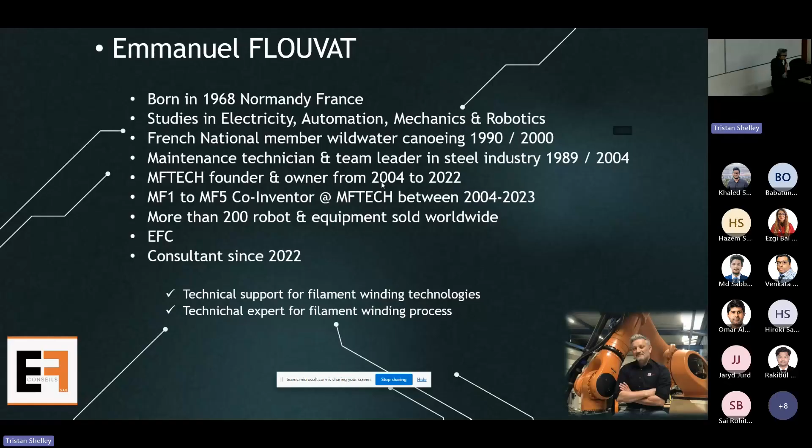So where I am involved today on some small parts, for example, continuing developing kayak shafts. I assist my customers also to develop gas tanks or other kinds of shafts or propeller systems, new systems with filament winding, easy to use or maybe sometimes in a complex way. So this is the job I'm doing today everywhere in the world.

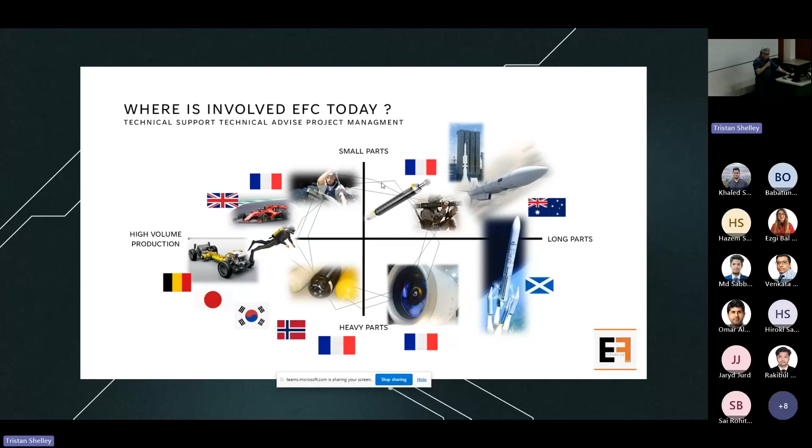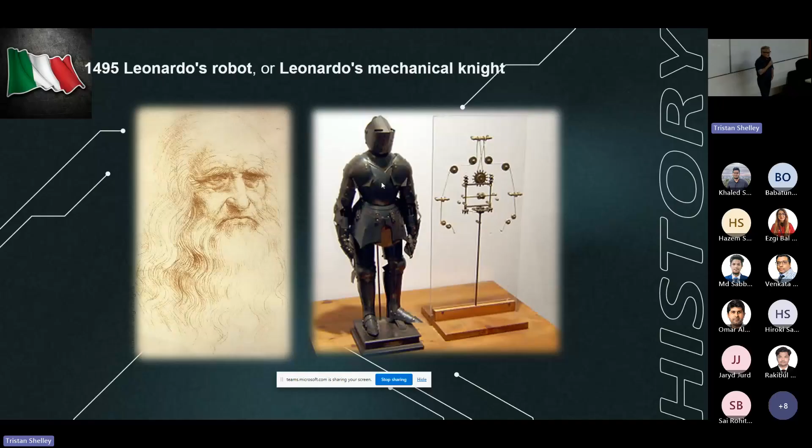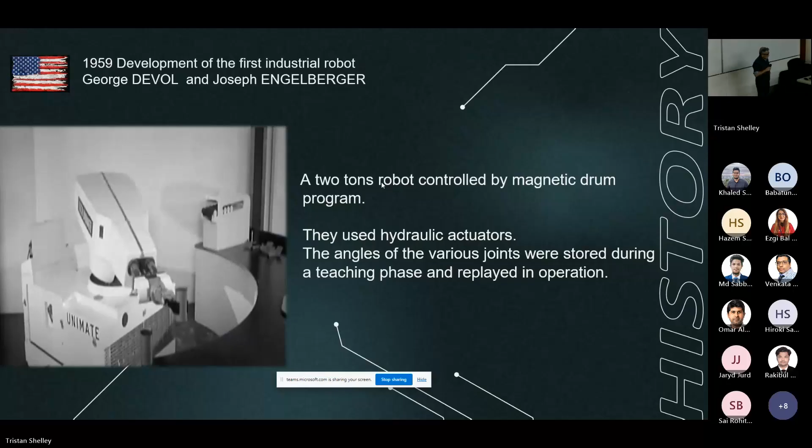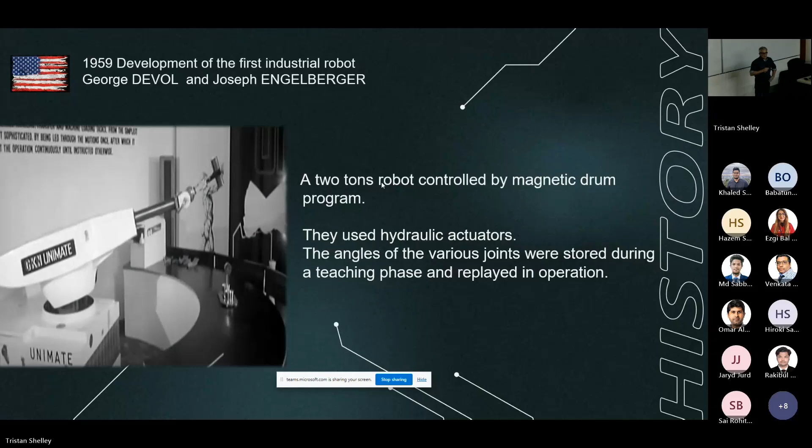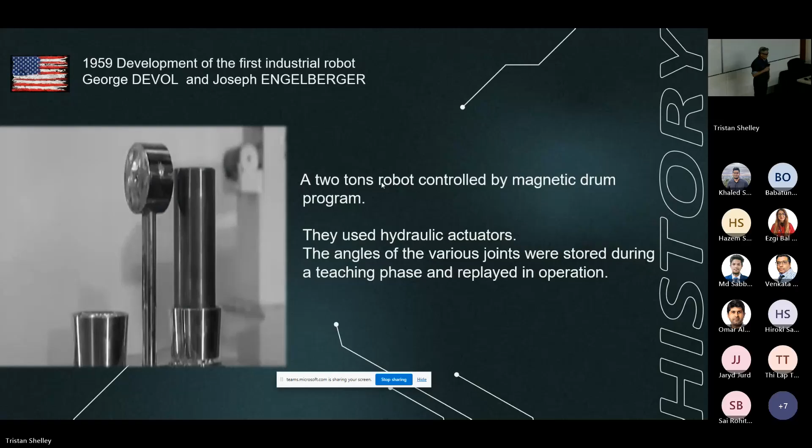So the first video I find, or some colleagues discussed, the first robot. It was in the US in '59, where 2 guys developed this new kind of machine. So maybe '59, but it was the first idea of a robot, and it was very accurate.

So robotics today - what we know is that robotics is everywhere in the world. So another video to introduce the robot today from the IFR, International Federation of Robotics.

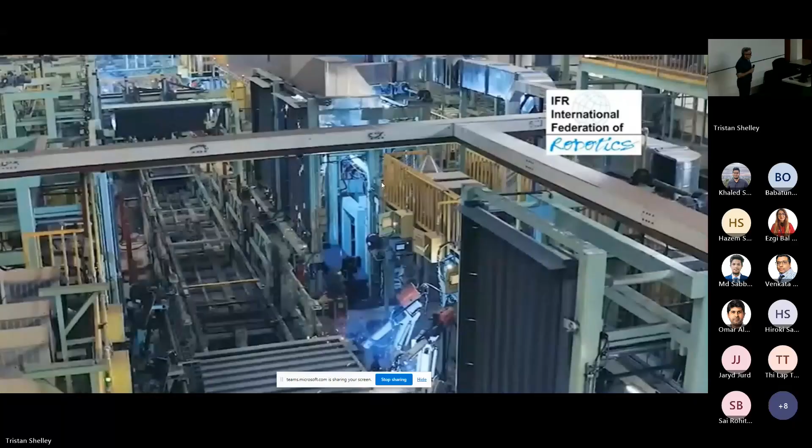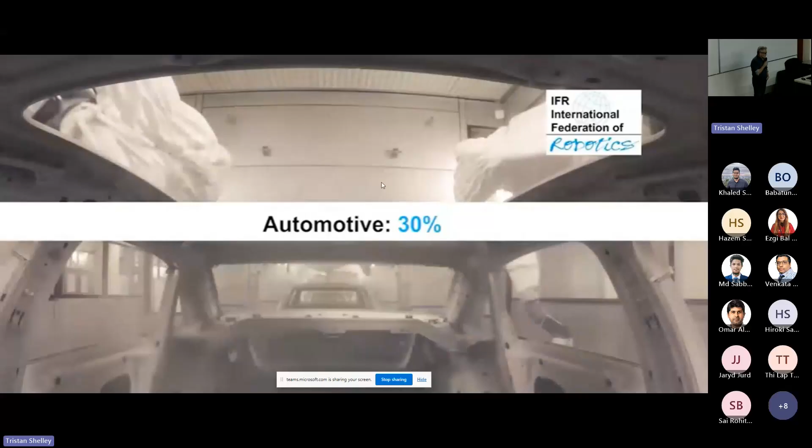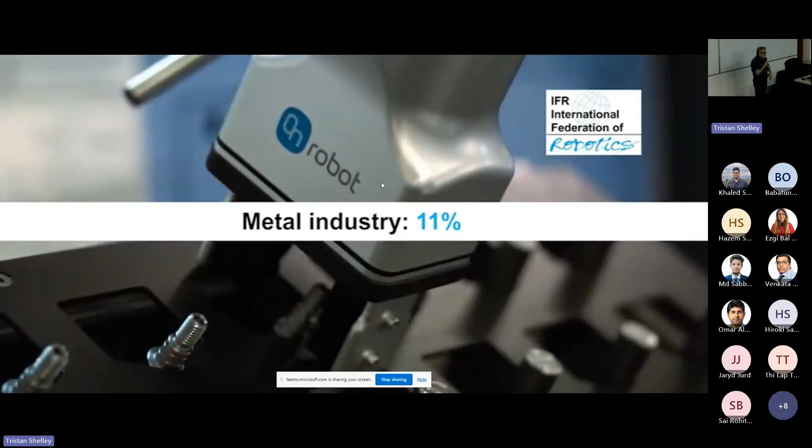So automotive is 30%, that's a big number. Electronics, 26%. Metal industry, 11%, so it could be shared with automotive to weld the frame. And investment today is huge, a huge amount of investment for robotics all over the world.

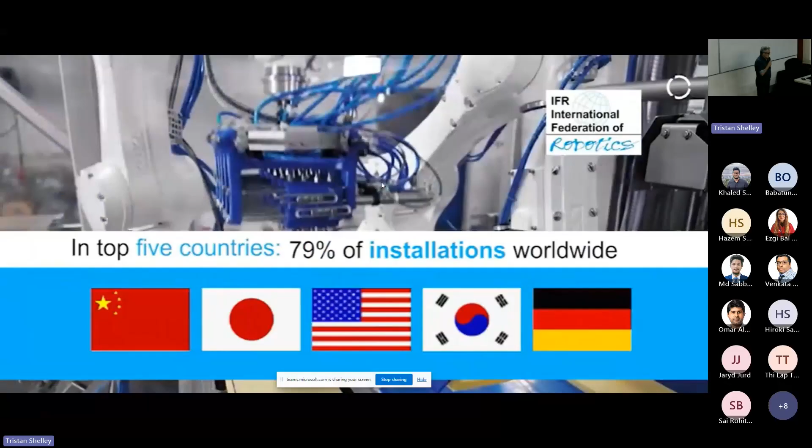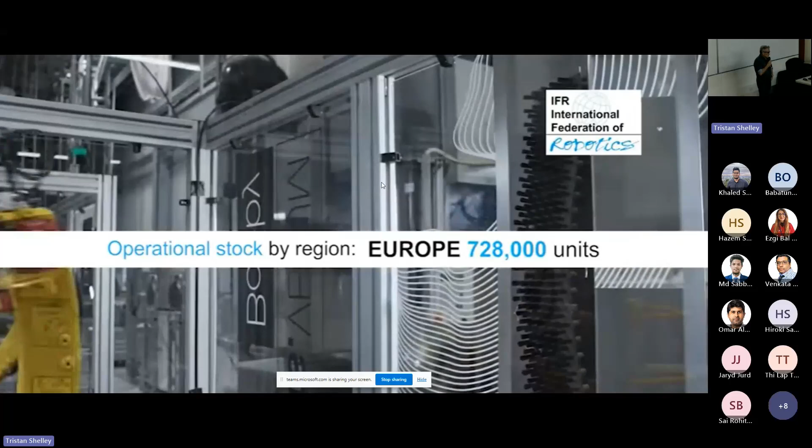So in the top 5: China, Japan, US, Korea, and Germany - nearly 80% of the robots in the world. And by region, 2.5 million in Asia, Europe 700, America nearly 500. So this is robotics today.

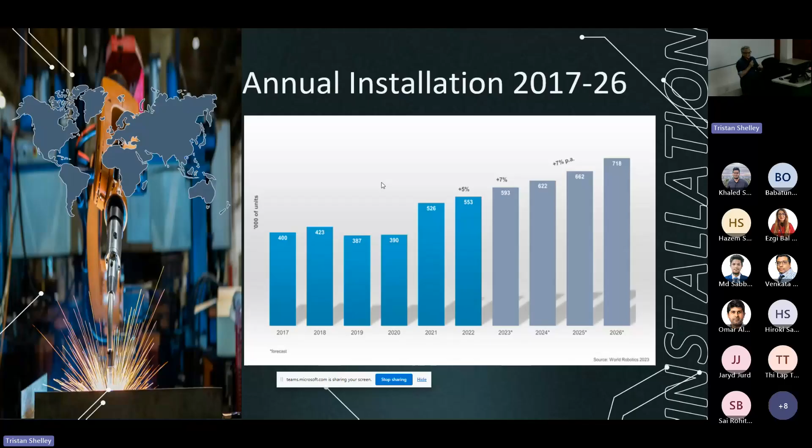So the total installation, it's a huge amount, and we can see on this picture that it's going better and better year after year. So we have more and more installations all over the world. The critical thing today is that the number of companies installing robots all over the world is not enough. So installed robots, in '23 it was plus 10% of the number of robots installed all over the world.

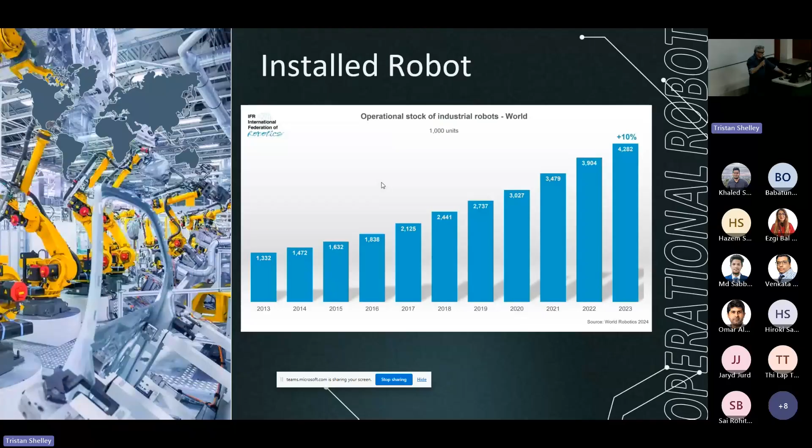And for me, it's maybe the first idea of filament winding.

So you use a tape and wrap something. This is the oldest technique I can find. There's another way to make it even simpler.

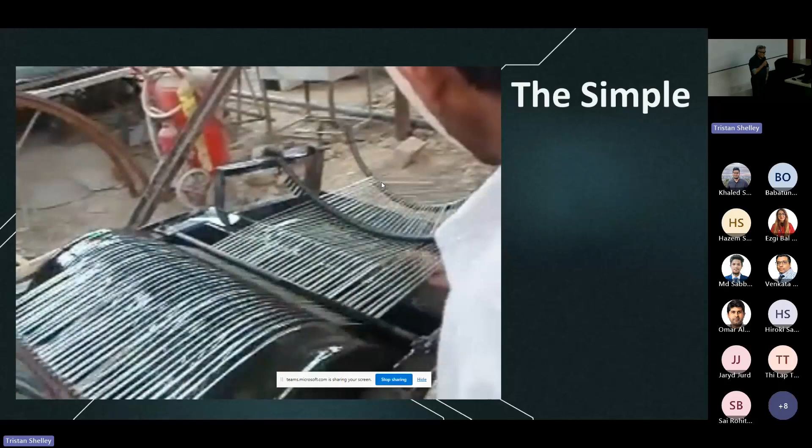This is a video I found showing real filament winding. The guy is walking inside, and we have a cross carriage with the fiber. For me, this is the simplest machine. You just have to move the resin bath from the front of the tank and it's working. This is simple, low cost, low energy, low CO2 emission. So it's something we can think about.

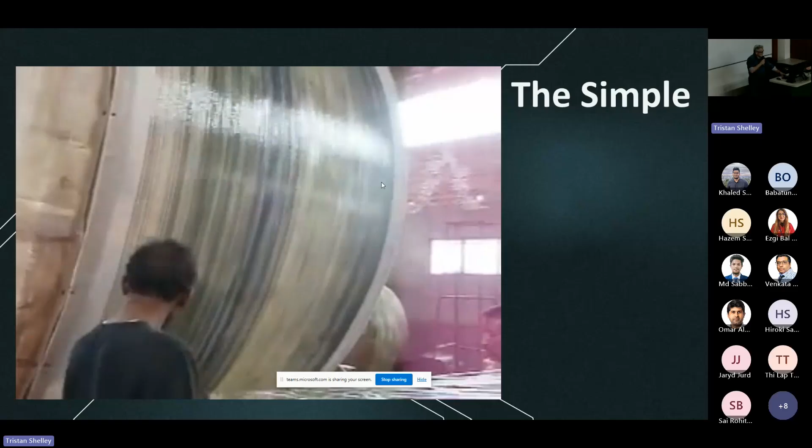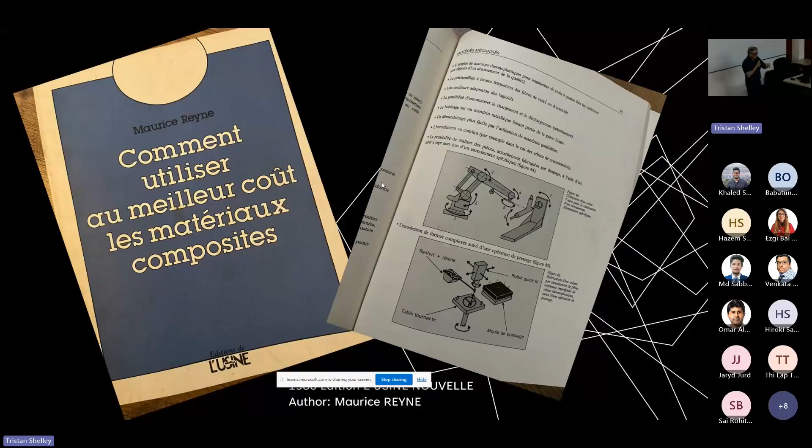The first time I saw a picture of a filament winding robot was in a French book by a man called Maurice Reyne, titled How to Use Composite Material at the Best Cost. I saw this picture. The book was from '86. I think I found it in the early 2000s, and it gave me the idea that maybe we can do something with composite and robotics to produce complex shapes.

So today, where are the filament winding robots or equipment that I know? They are nearly everywhere in the world, because at MF Tech we sold close to 200 machines in the past. This is for high volume parts - we can compare it to gas tanks for cars, for H2 or CNG, or even for scuba. A lot of scuba bottles are made with composite.

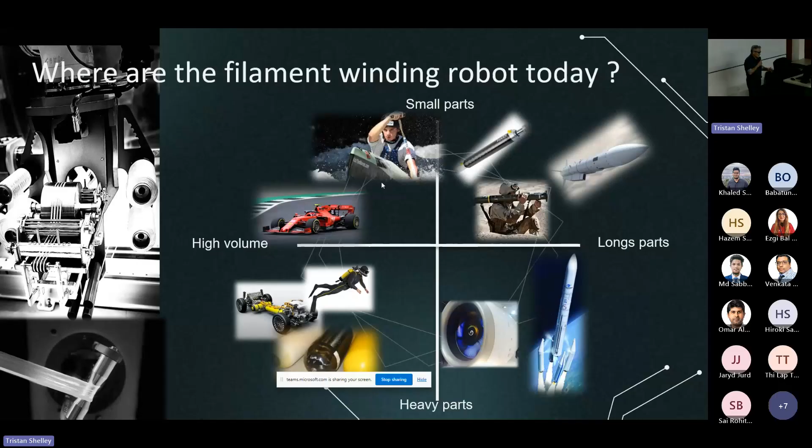Long parts could be rocket motor cases. Small parts could also be small rockets or small launchers. We have a lot of weapons made with filament winding today.

So we have several methods to wind the parts. The classic method with robot: imagine a kind of spindle. This spindle moves the part, and the machine comes and applies the fiber on the mandrel. What we call the mandrel is the rotating part.

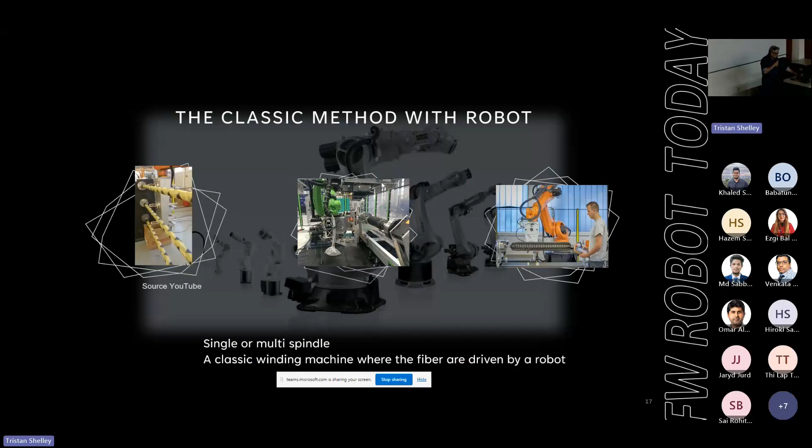Here's an example of equipment from MF Tech. This is a company called Wintech in Norway, and they are winding some tubes, applying Kevlar all around to make a protection. This machine was also transferred to USQ three years ago, if I remember well.

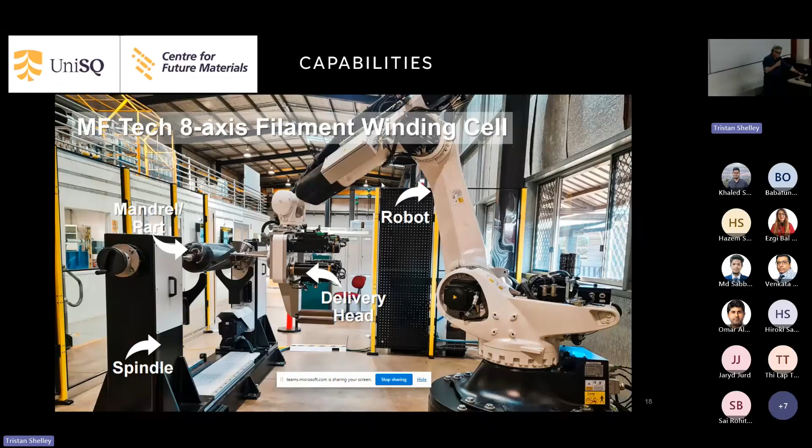This is an equipment where you have a spindle - you can imagine the part is rotating, and we have the robot to move the delivery head. On this delivery head, we can load the bobbin, some towpregs, some different kinds of material. More recently, this is the format of the machine - what we can do: towpreg, slit tape, wet winding.

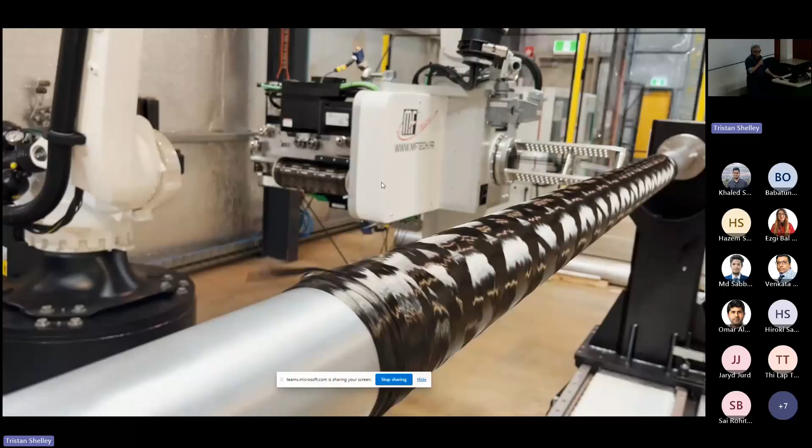This week, I installed this filament winding system, a new option on the machine. We put in a wet winding head. Here we can see we are winding with 4 fibers. These 4 fibers, before being applied on the mandrel, go through this rotating stainless system on a drum with some resin. So we are now able to use dry fiber and resin to make impregnation directly on the machine.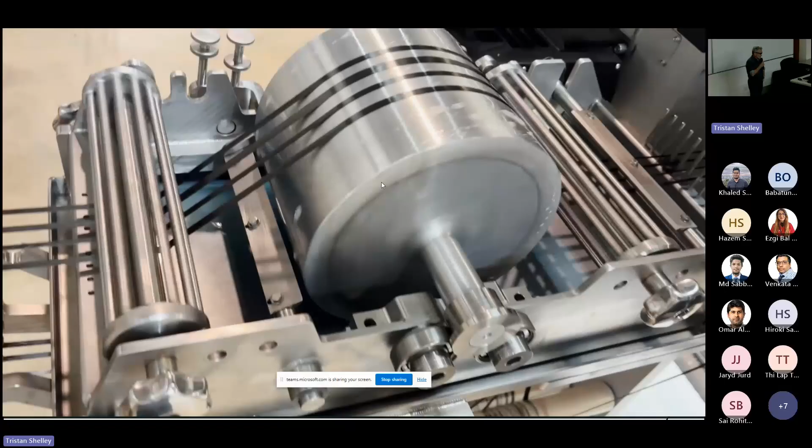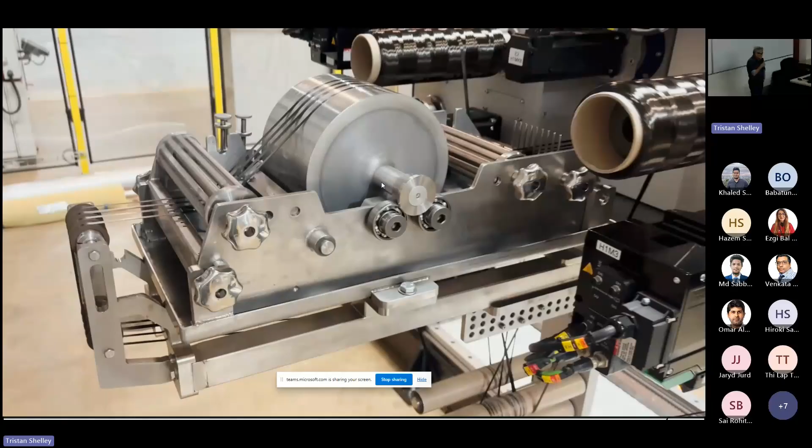This means we can use different kinds of resin and fiber to wind new prototypes, new equipment, or to test new fiber and new resin on the machine. This is the equipment you can use today here in Toowoomba at USQ.

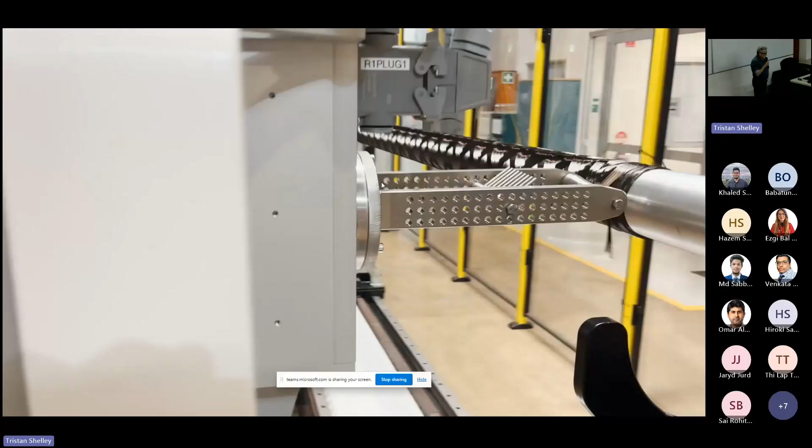Coming soon, also a new option on this winding machine: we are able to remove the winding head and put on another tool. It could be like a 3D printing system or other things - milling spindle, gluing gun - and make what we want.

We are also working with a new partner, Carbon Axis, and we will remove the MF Tech head to put on the Carbon Axis head, allowing us to make fiber placement. The difference between fiber placement and filament winding: with filament winding we have rotation of the mandrel and the fiber follows a continuous path. With fiber placement, it's a non-continuous path, and we apply the fiber where we need it on the mandrel to make localized patches, for example.

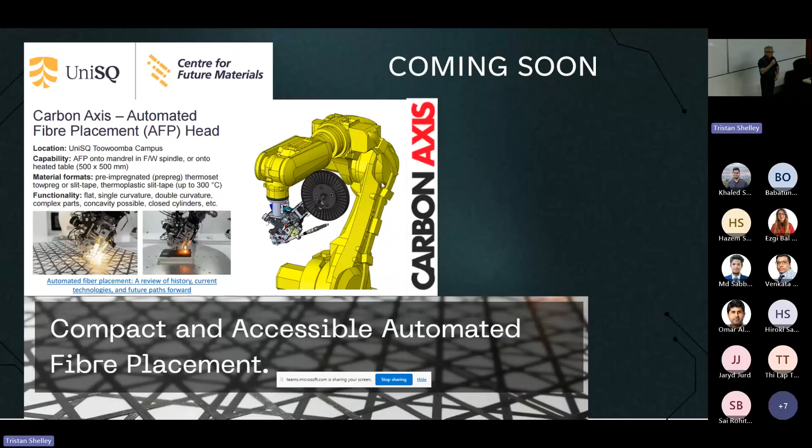It could be on the drum, it could be on a flat panel. With this system, you can see in the drawing at the bottom of the picture what we're able to do with this kind of machine.

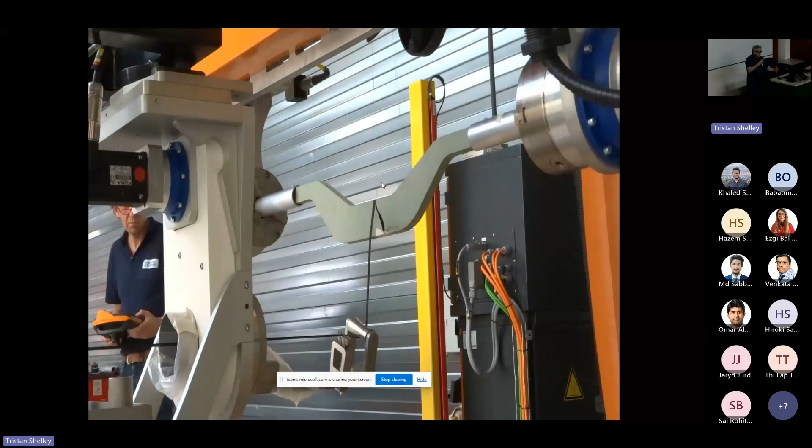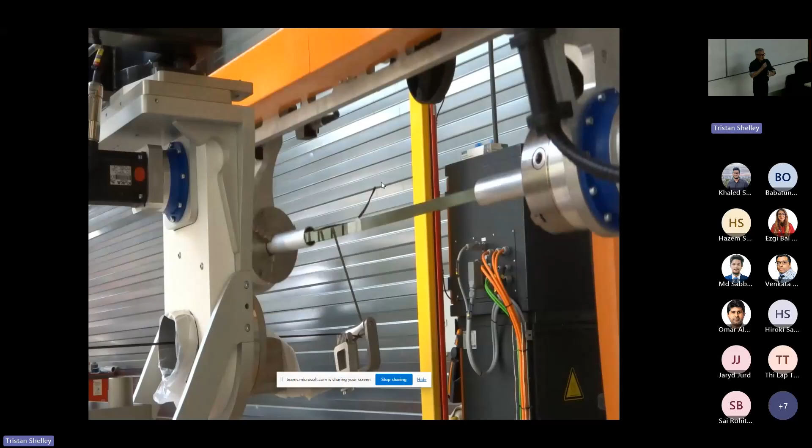Another example - we don't have this option today on the machine at USQ, but we can imagine the robot carrying a small spindle to make different kinds of parts, where the fiber could be static. For example, a thermoplastic application: all the mechanics to make the impregnation is very complex, so it's better to carry on the robot. In some cases, we can carry the part directly on the front of the eyelet to be able to wind the part.

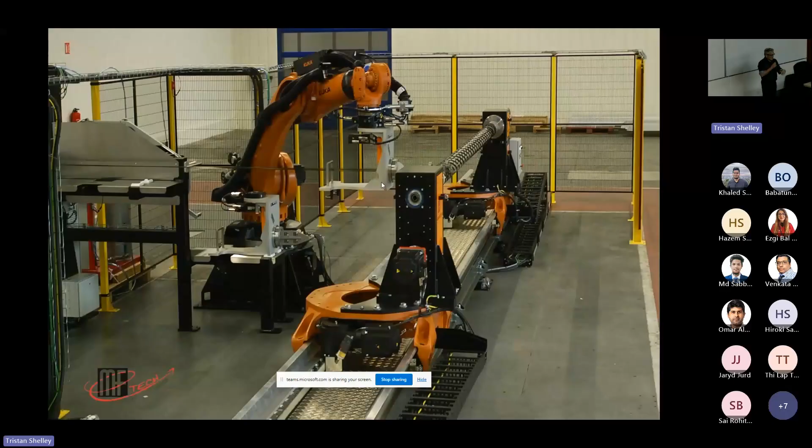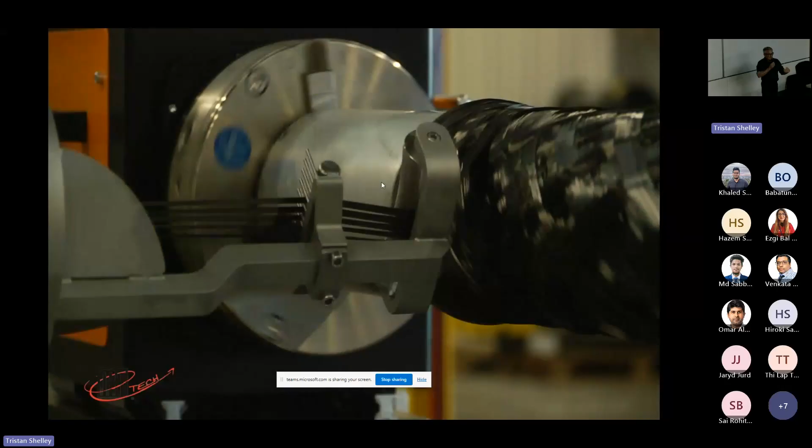This machine, the moving mandrel, it's because sometimes when we use some pitch fiber, for example, this fiber is very easily to break. So we can imagine that we have a straight path, and to avoid the deviation on the fiber on a lot of rollers, we move directly the spindle in front of the eyelet of the robot.

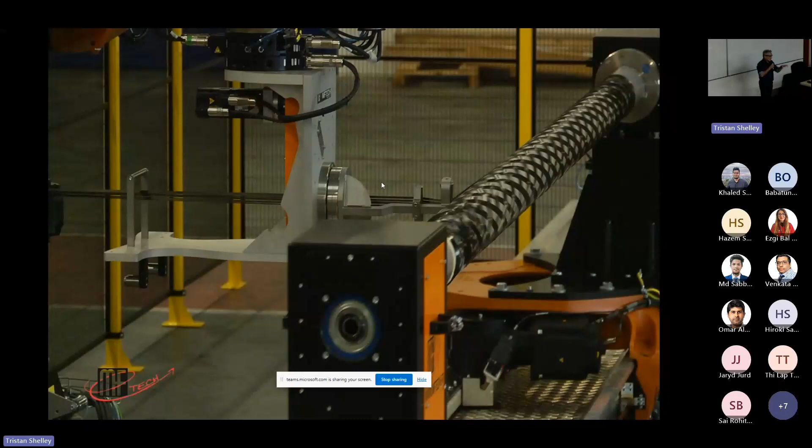And this equipment also, the robot can change the head on several. We can imagine to have aramid fiber, glass fiber, carbon fiber. So in an automatic way, the robot can change its own head.

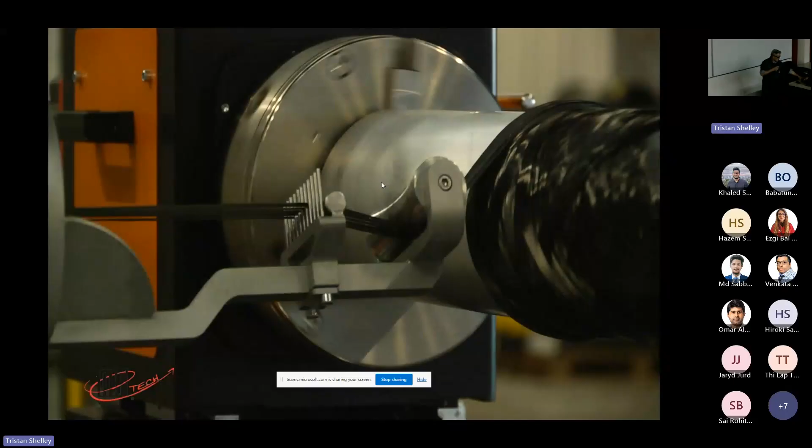So I asked recently to AI what will be the future of the robot. So this was the question: what will be the future of robotics? It takes a few seconds. I use Copilot for this.

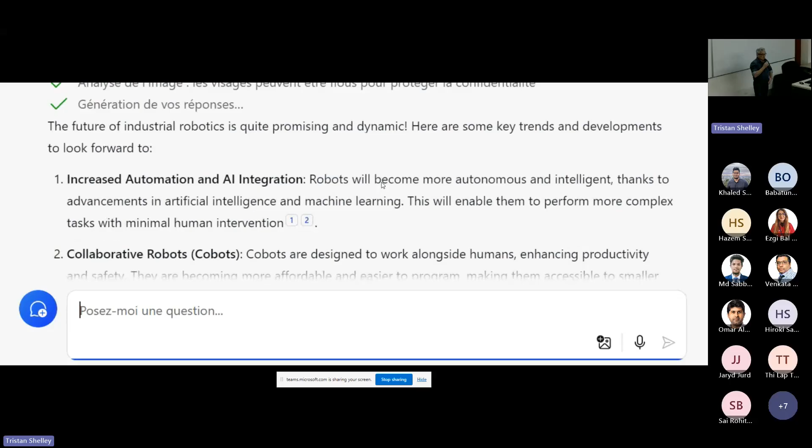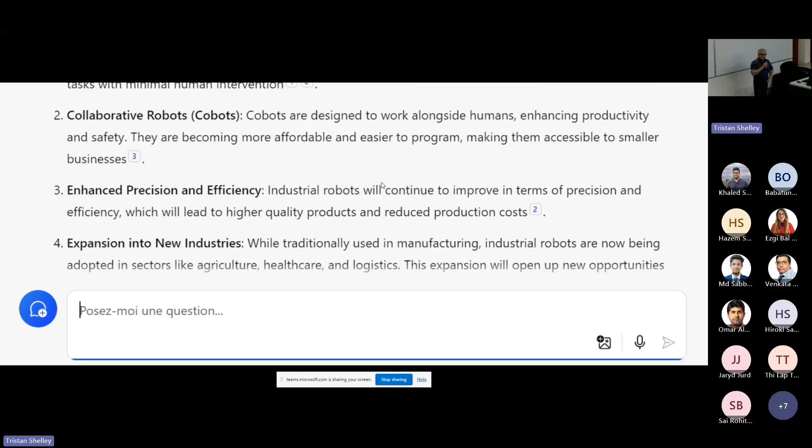So we have a lot of answers. The answer that is coming really fast now with AI and robotics today is that robots will work more with humans. A lot of people think that the robot could be dangerous, but more and more we are going to automation, we are going to collaborative robots, so the human can work directly. We have a lot of safe processes to assist humans and to be sure that the robot is not dangerous for the people.

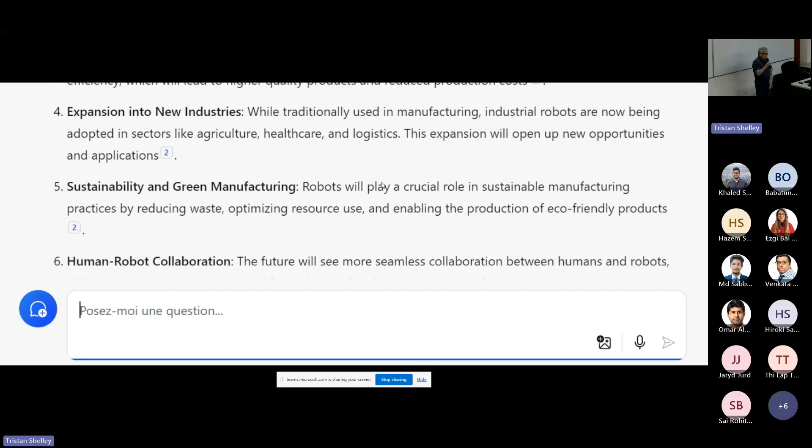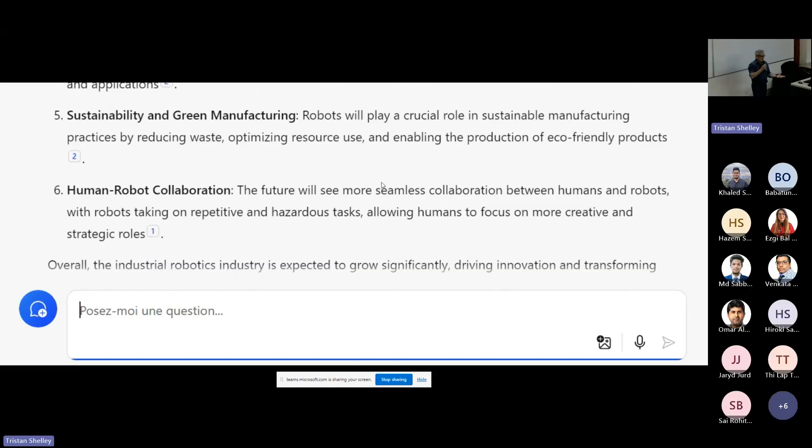So the growth of robotics, as we can see a few minutes ago on the video, is more than in the last years. We have more and more growth and production of robots all over the world. From the United Nations, the Sustainable Development Goals, we can see that there are 17 points from the United Nations, and 7 points the robotics can reach. You will see in details later in the presentation.

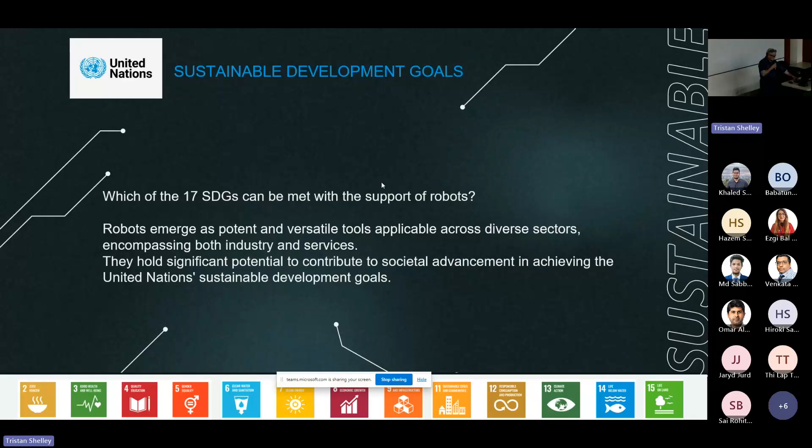So conclusion, or what we can say is: robotics is not dead for sure, because some people were thinking some years ago that the robot is not enough accurate, not enough safe to be developed for new applications. But now we can say that in the last 5-10 years, it's totally different.

We use the robot everywhere. Also for surgery, for example, or for X-ray now to treat cancer. Sometimes we use robots in some cases.

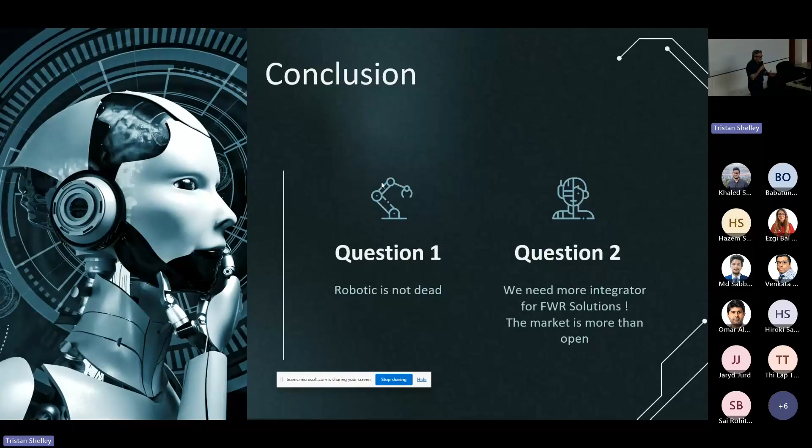And for the question two, it's that we need more integrators. So what we know today, there's not enough companies to build machines with robots and automation. That's a big problem. I don't know here in Australia, but in Europe, it's a bit critical. Not enough people also.

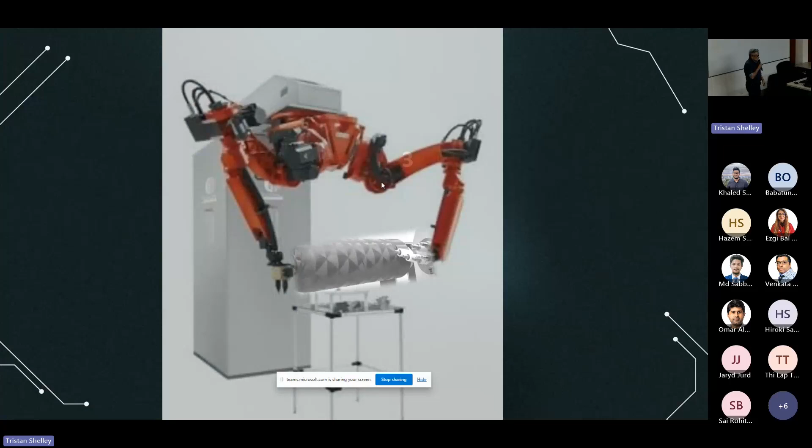Some example of what could be the future of filament winding. So at MF Tech, we also created some years ago this called MF5. So this is an idea where you can rotate the spindle and the robot, they can handle directly the parts to be wound in front of the eyelet.

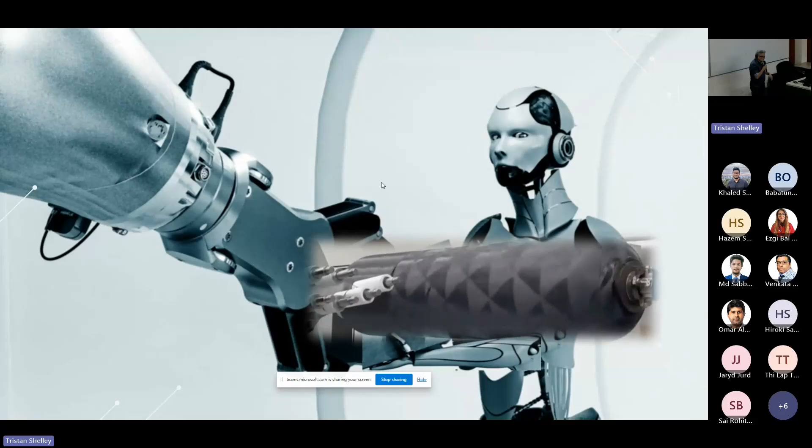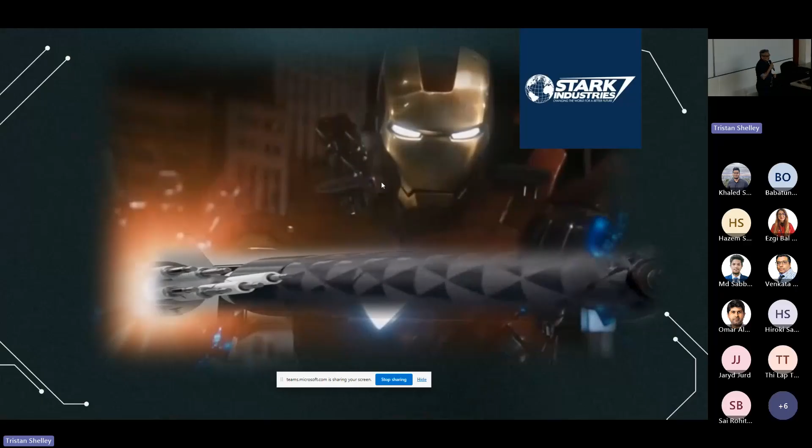It could be also this way, where you can have kinds of parallelogram robot and a humanoid robot. They work together instead of having a man. This is an idea, and this one by Stark Industry, I like it. It could be because Iron Man maybe is dead, but not in that way. So it's a joke, but it's maybe a way that we can use the robot too.